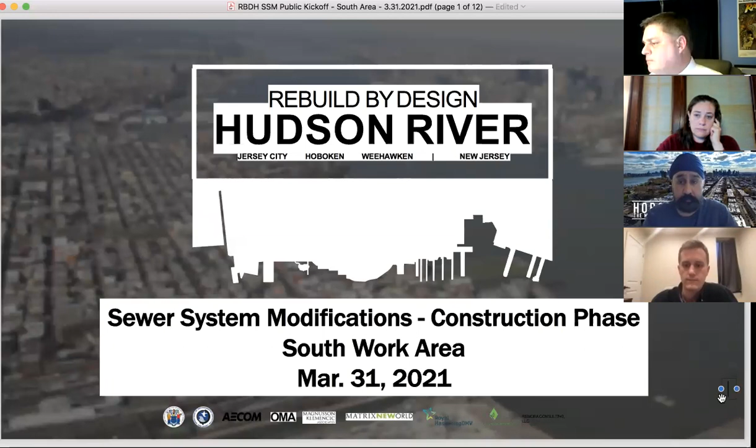Rather than have everyone one by one come online and say hello, I'm just going to introduce everybody on the team. You're going to hear from John Miller tonight. He's our SSM construction manager for the department. He's going to be the face of it on the ground. He works for Frank Schwartz, who's the project team manager. You've met him for the last 5 years, he's been at every meeting. He and I have been partners in crime for 20 years, and we are so excited to get started.

And Alexis Taylor, you all know, she's our community engagement lead, but does almost everything else too. I think she's just as thrilled to get started.

The construction management firm we hired - we hired a firm to basically do our oversight of the construction contractor. I couldn't do it all, I couldn't staff it with state workers. So we hired an excellent firm called Berger Hill Joint Venture. Christopher Corliss is the program manager for the program. Him and I have been working on multi-million-dollar projects for 21 years together. I think we finish each other's sentences, and I'm so glad to have him as a partner to make sure that we're inspecting our construction contractor properly.

Erin Percival is new to the group. You might hear from her at the end of the night. She's our community construction liaison. You're going to have her personal phone number and email address - Alexis is going to give you all that stuff. And if you have a problem, a question on the project that's not an emergency, you just give her a call. Then Matt Barboni, he couldn't be here tonight, but he's going to be the head inspector. He's the project manager on the ground for construction, and I'm thrilled to have him on the team.

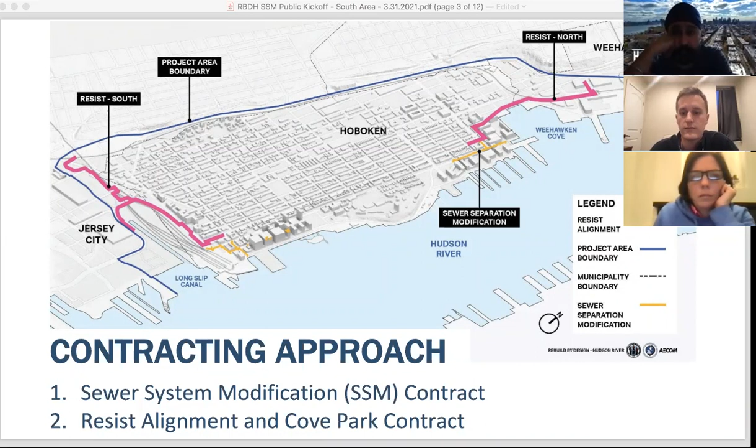The primary contract for this system will be the resist alignment, or the resist structure contract. It will involve construction of over 9,000 linear feet of flood wall, floodgates, and levee structures that will provide a greater level of protection for the municipalities in the project area from coastal storms similar to Superstorm Sandy.

During Superstorm Sandy, the primary breach points occurred in the north via Weehawken Cove, shown here, and in the south through the New Jersey Transit Terminal and the transit yard. The structure will be constructed in both the north and south zone, shown in this pink line here, with the idea that it will cut off those breach points and protect the city from future coastal flooding.

Today, though, as Dennis has said, we're really here to talk to you about the first contract that will be constructed as part of this project. That's the Sewer System Modification Contract, or the SSM for short. This is the smaller of 2 contracts, but it's critical to ensuring the resist system can function properly.

Essentially what it does is it involves separating portions of the existing combined sewer system in the city and putting them into separate stormwater and sanitary lines. You can see the 2 locations shown in yellow here, one in the north just outside of the line of protection, and one in the south also just outside the line of protection.

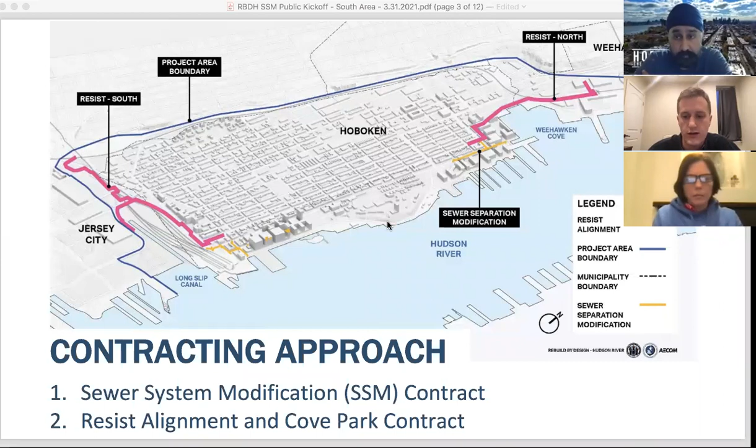Moving on, I just want to dive a bit deeper and reorient everyone. As stated, construction of the SSM will be occurring in both North Hoboken work area and a South Hoboken work area. Today we're going to be focusing on the south area shown here. You can see the drainage areas in blue and some of the manholes and inlets that we'll be removing and sealing, represented by these yellow dots.

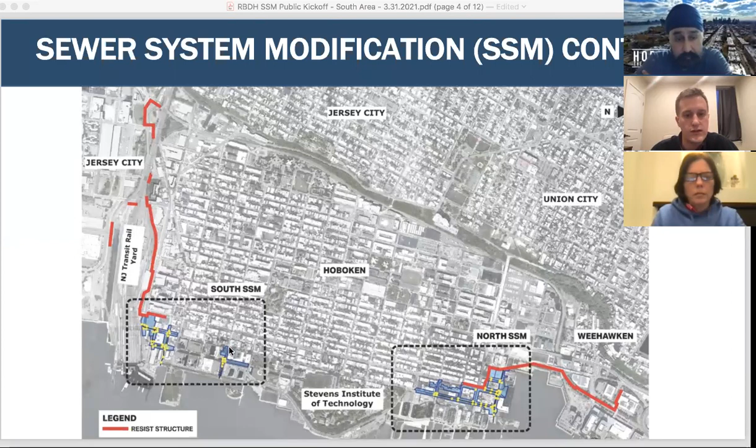Let's start by touching on some of the basics pertaining to this south work area. The work in the south area will begin in May of this year, and it's expected to run through September, October. On the left, you'll see an aerial map of the work with colors to indicate the approximate schedule for these work zones. As you can see, the work will begin in May at this downstream structure, and the contractor will be working upstream or uphill from the outfall structure here.

On Sinatra Drive, work in May and June will run up Newark Street in this pink zone right here and turn southward on River Street. Then as we get into June and July, we expect to be turning onto Hudson Place and working up to Hudson Street before turning toward Observer Highway.

The contractor will finish their work on the corner of Observer and Hudson Street in July or August. That's shown here in that light green. And then you see another light green area where he'll come back to Newark Street to complete the stretch from Hudson to River Street.

The final work areas in August and September here in the purple, you can see we'll actually be completing the connection of this large southern system to the existing outfall. And then we'll also be touching a few areas, the intersection of 2nd and River Street here in orange, and the intersection of River and 3rd Street in September and October.

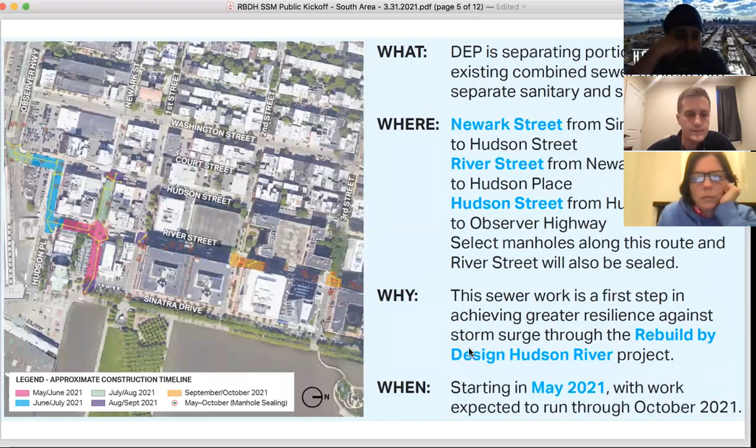Moving on to the broader scope of construction. The scope of construction in the south will comprise of laying over 2,000 linear feet of pipe, shown as these yellow lines. We'll be installing new manholes and catch basins, installing water quality control units to remove suspended solids from the stormwater. And we'll also be sealing and waterproofing existing manholes, as I said.

You'll notice on the right here in this figure, we're showing day and night work. As we've discussed, there is going to be some overnight work taking place. That's shown here in pink, and the day work shown in blue. I'm going to really touch on the day and night work on this next figure so you can get an idea of what we're talking about.

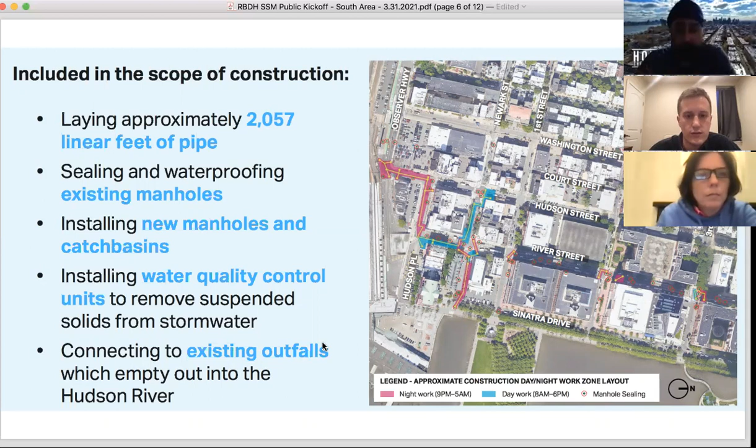Again, you can see that the day work is shown in blue, the night work shown in pink. A majority of the work is overnight work. It'll be occurring from 9 p.m. to 5 a.m. The decision to perform overnight work was made in consultation with a large task force of representatives of the city.

It was discussions with the Hoboken City Engineer, the City Transportation Department, the Police Department, Fire Department, Office of Emergency Management, and even discussions with New Jersey Transit that determined many of these work zones would be best suited to overnight work, with this being such a large hub for transportation and densely packed urban environment.

It will create a safer work zone, reduce and minimize conflicts with pedestrians and private vehicles, as well as buses and cyclists. Construction during the AM or PM rush would likely cause significant negative impacts and be too disruptive for the city.

There are some stretches, as I said, along River Street from Newark to Hudson Place here, and Newark Street from Hudson Street to River Street, where the day work is proposed to occur. We're going to be actively coordinating with the city and with Hoboken Police Department to ensure that the work hours for each work zone are deemed appropriate for wherever we're going to be working and the type of work that we'll be doing.

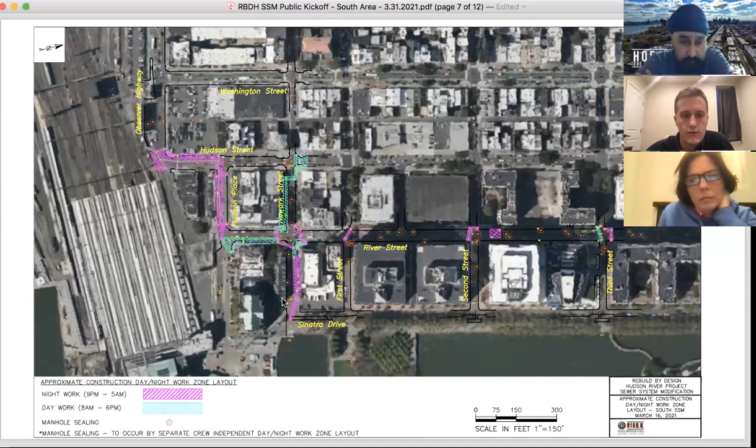Moving on to the first 1 to 2 months of work, I want to zoom in a little bit. During this period, work will be primarily along Newark Street and River Street. You can see again we have overnight work shown in pink, day work shown in blue. I should note that some of the initial work throughout all of the work zones will be a test pitting program.

This is used to confirm actual locations of existing utilities. We will be working with Hoboken Police Department to determine if some of this test pitting work would be less disruptive during the day, as it will involve smaller work areas and smaller crews, and will likely pose a lesser risk of disruption to traffic and pedestrian flow.

Now, this figure shows exactly where we're starting. I'll put my mouse on it, hopefully you can see. There's this outfall structure on Sinatra Drive and Newark that we'll be tying into. The contractor will be starting at this downstream structure right here - it's a circle with a square in it - right by the post office driveway on Newark Street.

This is one of the largest water quality control units in the project, so I will let you know that you can expect to see some heavier equipment during this process. We will be using a crane during installation, and we're actively working with the city engineer to ensure the proper permits are obtained and precautions taken during this crane work.

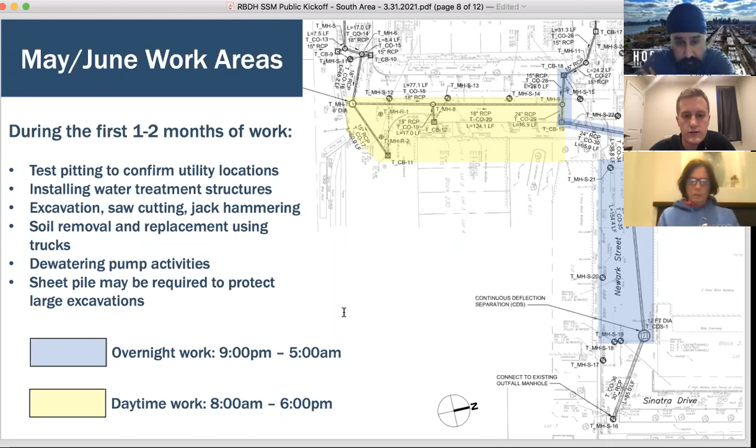But we are prepared to do what it takes to mitigate these quality of life disruptions as much as possible. Work will be performed within the permissible noise and vibration levels, and it will be consistently monitored. We can commit to that - we will have our construction management firm there making sure it's done.

The contractor will be submitting plans for noise, dust, and vibration control and monitoring these throughout the work. These plans will require the contractor to provide site drawings showing locations for monitoring instruments and identifying noise-sensitive locations, which I'm sure if you live in the area, is an important step that you'd like to hear we're doing.

Noise monitoring is required to be conducted during all construction activities, and vibration monitoring during all vibration-inducing construction activities. That includes, but is not limited to, excavation, sheeting installation, and the operation of heavy equipment. In the event that noise, vibration, or dust levels exceed acceptable limits, the contractor will be obligated to advise the construction manager immediately, and we will take appropriate action.

Moving on, another large quality of life issue that I'm sure everyone's interested in is the maintenance and protection of traffic and pedestrian flow. As far as vehicular and pedestrian traffic is concerned, the contractor will be adhering to detailed maintenance and protection of traffic measures that have been coordinated with the police department.

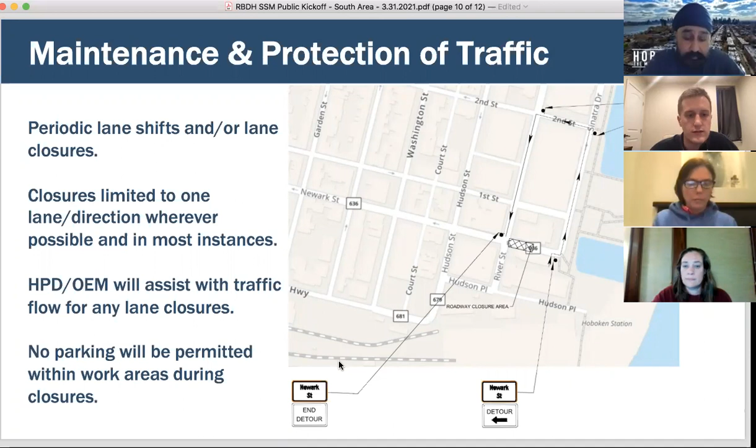So that covers most of this South Hoboken SSM work I wanted to share with you today. But I do just want to briefly provide you an update on where we sit with the larger Resist and Cove Park contract. We will be, in the coming month or two, performing some subsurface utility exploration work. This is just to verify existing utilities, their location, and ensure there are no conflicts outstanding with the design.

The design will be complete later this spring of 2021. And we do have some really key critical milestones that we want to hit in September of this year. We want to establish the operation and maintenance responsibilities, and we will be completing the easement acquisition for the entire resist structure alignment.

We hope to obtain the extension of the federally mandated expenditure deadline associated with the HUD funds funding this project. We'll be awarding the contract in late 2021, this year, and we expect this contract to be completed in late summer of 2025.

I do want to leave you with Alexis Taylor, just giving her a chance to share with you how you can stay informed on the upcoming construction activities and ways to keep in the loop about what we'll be doing over these next few months in your area.

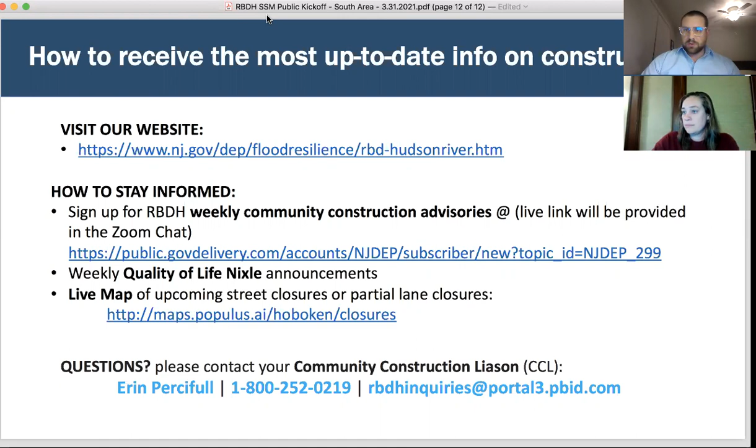Okay, thank you, Caleb. I'm sorry, I didn't realize I would be first. Yeah, you hit the buzzer, so your time is now, Jim. I have a very specific question.

The combined sewer outfalls—will this work actually separate the combined sewers into the more appropriate sanitary sewers being segregated from the stormwater sewers? So will we be achieving some of those benefits coincident with this work, or is this just what the work underground is—like putting a backstop on it so that the water cannot come in?

I think I can answer that. This work will help with reaching long-term control plan issues, separating stormwater from our CSO. Essentially the sewer system will stay in place, and DEP is building a new stormwater management system that will not interact with that combined sewer system. So we're really improving two issues with one project—that's the intent, for the Clean Water Act obligations.

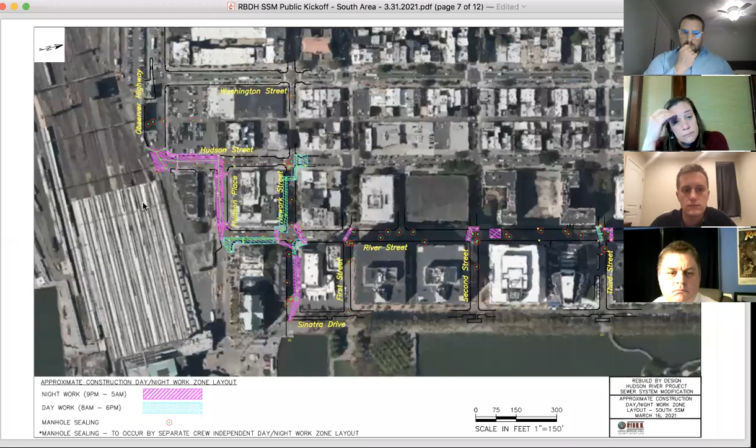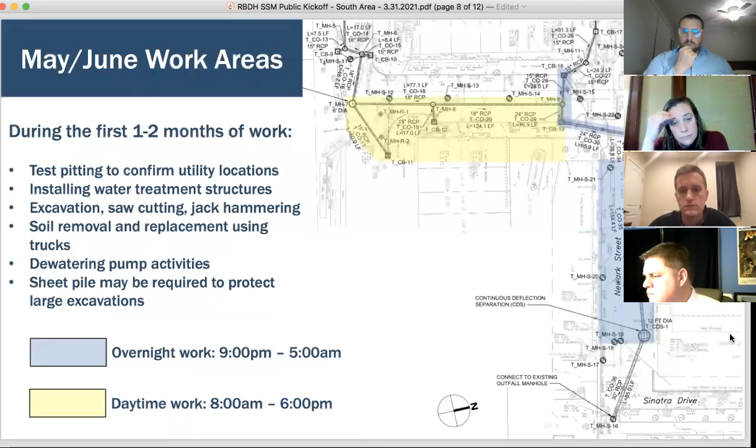It looked like there was daytime work right in front of River Street between Hudson Place and Newark, and I just want to confirm that. The other question I had was, are there any plans to disrupt the sidewalks in this area between Hudson Place and Newark on River Street? The answer to your latter question is yes, there are some sidewalk cuts and pipe runs that conflict with the sidewalk on the east side of River Street. The genesis of this conversation was the overnight work hours permitted by the council at the last city council meeting, and in working with DEP, they had flagged to us a schedule that said we might be starting as early as April.

So we thought that there was a sense of urgency in getting that information in front of the council and hosting this meeting specifically to discuss the concerns of 77 River and inform the larger community about the work that's been going on with Rebuild by Design.

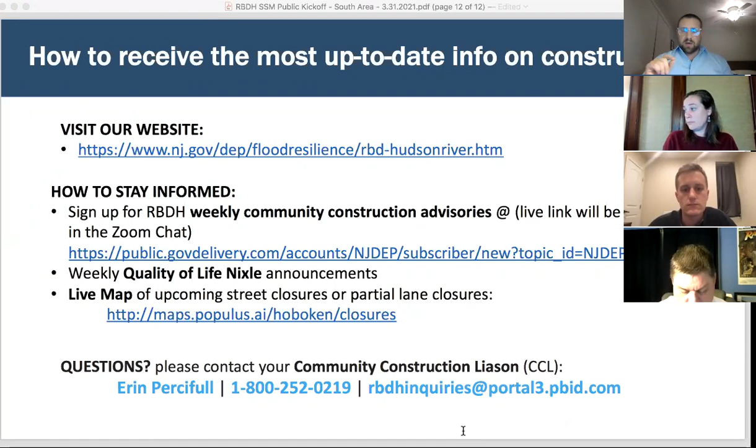But it was talked about at the beginning, I want to reinforce that construction activities are not proposed to start until the first week of May now. The schedule shifted a little bit because of some of the permits the contractor needs to provide. So I would make myself available again to your building to make sure we've been really clear about what we need to address and what's occurring in and around 77 River, including the difference between daytime and nighttime, maybe going into a little more detail with the scope of work occurring in this area.

Hello? Vito, I think that we might have lost your audio. Can you hear me? Now I can, yeah.

Okay, so specifically on the sidewalk issue, if the sidewalk will be disrupted, how will access be granted to the building? Will it be a plywood ramp or something? I don't think that the sidewalk disturbance is going to be adjacent to the building. It's going to be on the curb edge, immediately adjacent to the curb edge, those types of areas. I don't believe there's a run of pipe where we're going to lose access to the building. John, you can correct me if I'm wrong, but installing of inlets and catch basins takes place on the curb line as well. So I don't believe there's going to be a conflict, but we will go back and make sure there's not.

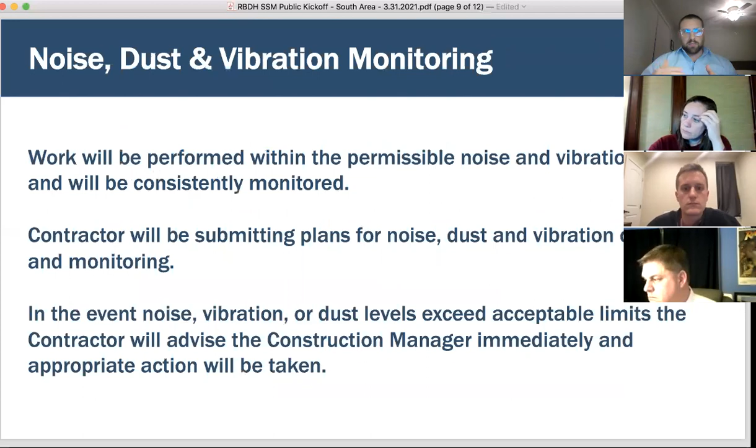So if you're on the corner of River and Hudson Place, the building will physically be a buffer. So the corner of River—no, River and Hudson, like right? Is that not the right street that I'm saying? Yeah, River and Hudson Place. Go to the left a little bit. Nope, other way. Keep going towards the PATH station. I'm at 77 River, you need to move your cursor. Yeah, that's 77 River, and that is that corner right there, which is the south corner.

So there's going to be construction night and day. I get it, but at night I need to know: are we going to be able to sleep here? Are we going to have to move out? How loud is that? So I just Googled it. A normal conversation is 50 to 65 decibels, and a vacuum cleaner or a hairdryer is 70 decibels. And I think the overnight noise limit is 65 decibels, but it's still going to be a construction site. We'll have staff there, DEP will have staff there to monitor how noisy it is and when those activities are occurring. I don't have a clear answer for you.

Okay, so the other question I have is about the vibration. I don't know if it's unfounded to think about that, but if there's damage to our building, are we going to have any kind of recourse for that? Is there anything in this plan for that, or are we kind of on our own in having to repair our building? Definitely not on your own—there's protections in the contracts with the DEP and the contractor, as well as the city issuing permits for this project. There's protections through bonding. There will not be an expense that's encumbered if there's damage that occurs from this project to your building.

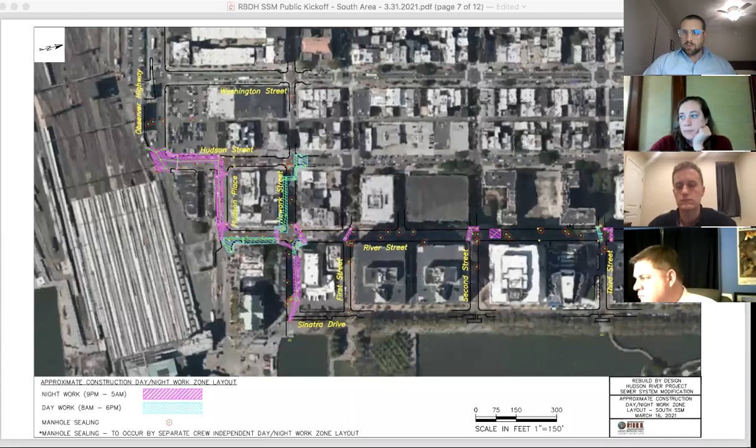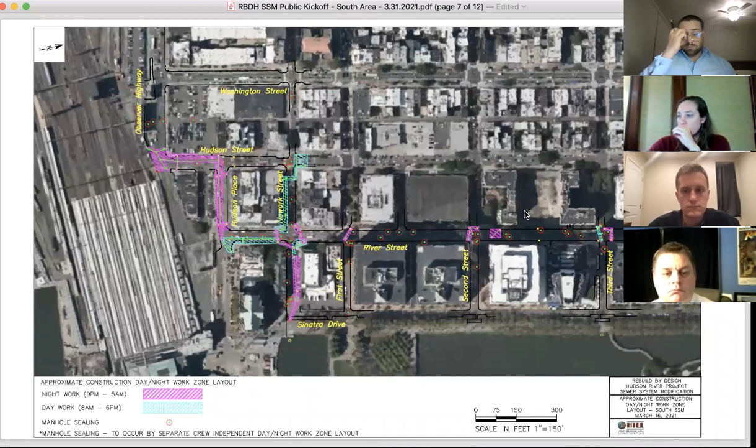Thank you, I'm another 77 River Street resident. My question is, I just wanted to confirm, it looked in the beginning like our building will be affected by construction noise and various issues in May and June 2021. Is that correct? Or will there be work outside of that time?

So in terms of how we are affected, it looks like October 2021. The scope of work immediately adjacent to 77 River will be undertaken in May and June, depending on the pace of construction, as scheduled by the DEP. Then later in June, July, we'll be turning onto Hudson Place and coming up toward Hudson Street, which is a little farther from 77 River Street.

And another thing, just to clarify, there will be a smaller crew sealing manholes throughout these streets, but those are much more compact, and the work is not nearly as noisy. So it should be much less disruptive.

So if I understand correctly, it'll start in May and June, but it shouldn't be too bad even though it's close by. And then as it gets a little farther away, it will become more intense and more likely to be disruptive in, say, June or July. Am I understanding that correctly?

I'm sorry if I misspoke. I think it would be fairly consistent, the type of work coming through. I was saying the manhole sealing, which is a separate crew with much more compact work areas, may be less disruptive, but that will be happening with a separate crew throughout the streets of the work area.

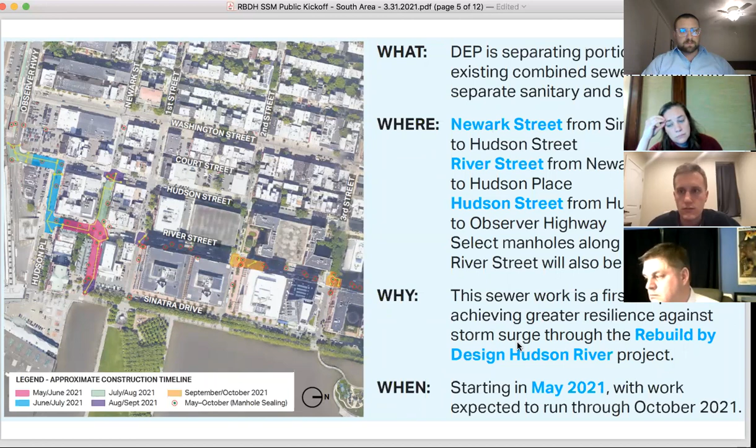John, can you go to the slide that breaks out the different daytime and nighttime construction areas? Maybe the next one.

You're on mute right now, John. But Carolyn, the run from River to Sinatra on Newark is overnight, and the run from River, from Hudson Place to Newark, is during the daytime. So those two work areas won't occur simultaneously, so hopefully there's transition or relief during that time.

Just to echo my fellow tenants—not tenants, owners, residents—thank you for doing this. It is much needed. I was here during Sandy, it's very tricky, so we really appreciate your efforts to work with us and tell us what's going on, and just do the work that's much needed.

Thank you very much, Carolyn. I think Alexis, you'll probably hit on this more than I could. Why don't you talk about the outreach, that every week we're going to be updating the schedule, right? This is the best we know today.

Communication is going to be key, and as any schedule information becomes available, we will be sharing it weekly. I did want to reiterate, it won't be 24 hours of construction, even though I know we're saying daytime and nighttime construction. It's not that you'll be surrounded 24 hours by construction—there is a daytime zone along River Street and a nighttime zone, but those will be sequenced.

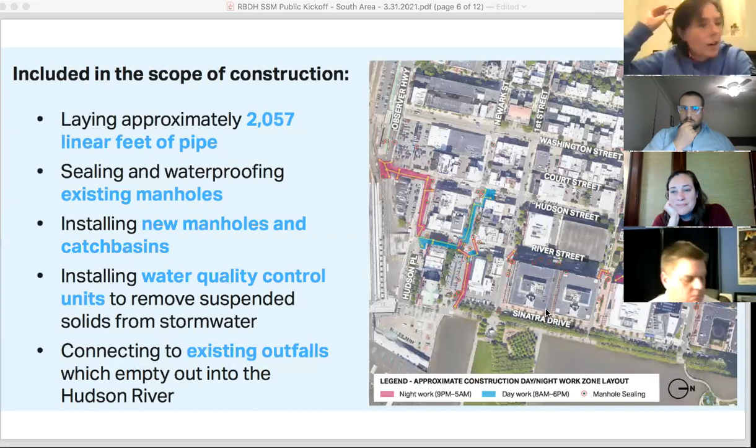Every Friday we do a construction update. Councilwoman Giattino, you want to add something? It's funny because Councilman Doyle sort of just asked what I was going to ask, but is there a way someone can sign up specifically to get a text or email regarding these updates?

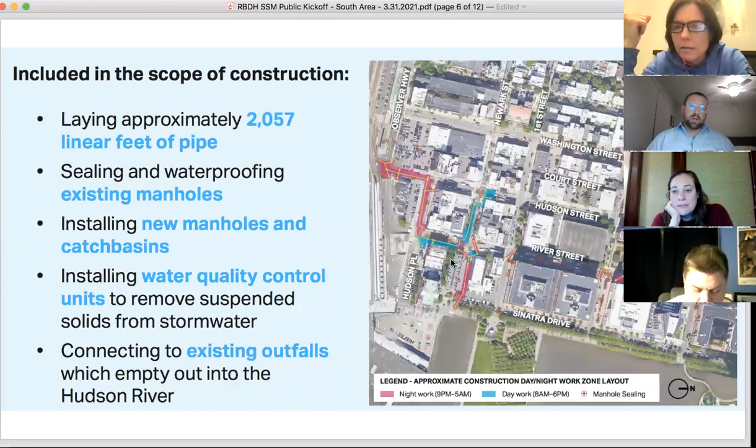Well, I know Alexis manages a listserv, like a Rebuild by Design listserv. That will contain the same information as the weekly quality of life Nixle, but that listserv will be where we make any special announcements, like when we're planning a similar meeting before starting construction on the north end.

The idea is to use the existing channels Hoboken is familiar with, like the weekly quality of life updates. But if there are changes, we can send those out to our listserv of subscribers without waiting for the weekly update, more frequently if there's a known change.

Is that an email or a text or both? It's an email, and there is the ability to sign up for text, but for the most part we send it as email. I didn't want it to get lost in a weekly Nixle for people specifically looking for that. Thank you.

We got one more attendee, Alan, now allowed to talk. Did that work, Alan? Is that the water boiling over here? That's not my water boiling.

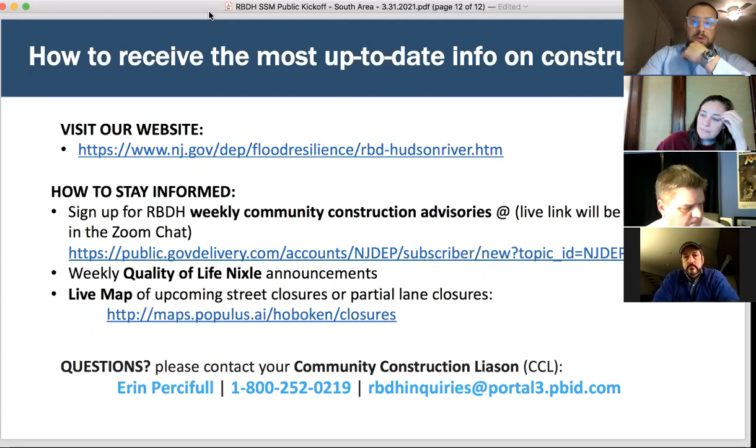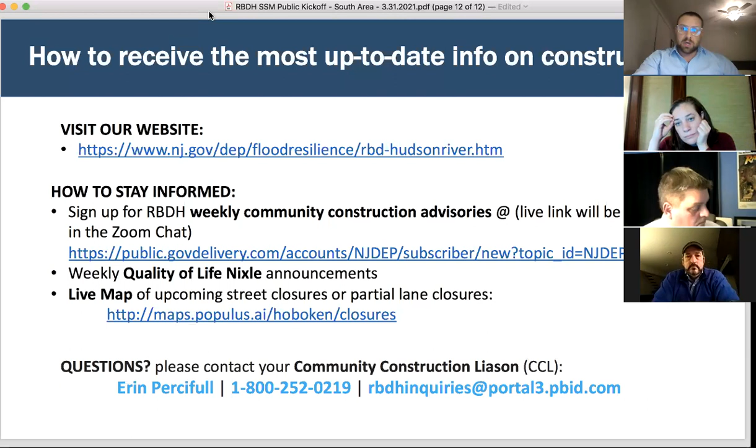This is plan A, and we're gonna do the best we can with the time we have. So is there some advocacy that can be done by community members to help move this forward with our legislators, with their senators and our members of Congress? Senator Booker, Senator Menendez - we've done the work, they know where the need is. If that's something you want to take on, I don't think it would hurt.

Thanks, Alan. Thank you. All right, I'm gonna just, Dennis, if you don't mind, wrap this up.

There's a couple ways for folks to grab information about this project, schedules, and dates. The first is the DEP website on the screen right now. The second is subscribing to the city's Nixle account. We'll probably be posting information on Facebook about the project too. My email address is cstratton@hobokenNJ.gov - that's CSTRATTON@hobokenNJ.gov. I've been working with the DEP group for a number of years.

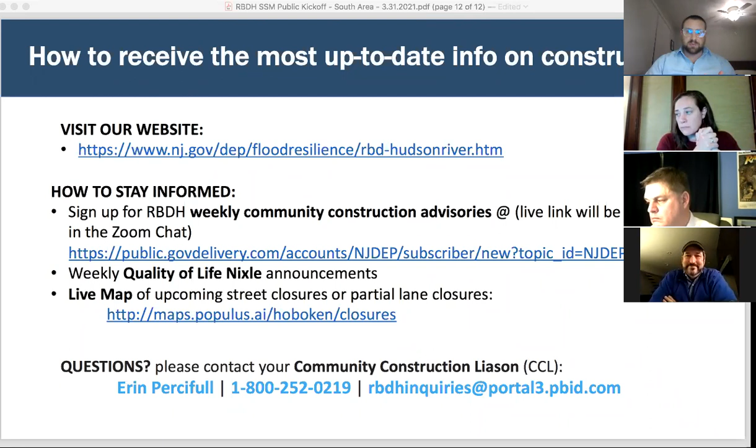Before we close, I just want to thank a number of council members who joined the call - there's a big group from the AECOM team, former Mayor Zimmer. I briefly introduced Olga, our municipal engineer working on the project, who will work with the DEP to make sure the concerns of the community are heard. Thanks to the team for putting this presentation together, responding to the council's requests, and making sure we get off to a good start with construction activities for the project. Thank you all very much.